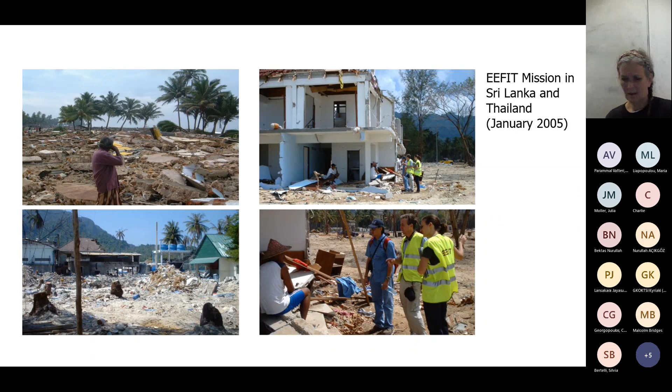Following the Boxing Day tsunami, a series of initiatives were brought forth, aimed at informing reconstruction, providing information on earthquakes and tsunamis, and considering disaster mitigation in Indonesia. Within 2 years, that had led to the establishment of the current Tsunami and Disaster Mitigation Research Centre. So when the Palu Bay tsunami happened in 2018, TDMRC were the obvious partner for the UK, and EEFIT began its very fruitful collaboration, including many projects led by UCL from the UK.

In the past few years, EEFIT has been looking at earthquakes and tsunamis over a longer period of time, not just a few weeks after an event. So they've done this for Japan and also went back to Nepal in 2022. We saw the opportunity of going back to Palu Bay in 2022, and then we thought, well, actually, we could do a follow-up from the 2004 Boxing Day event also, since we hadn't been able to go to that particular location.

However, due to the enormous physical extent of the Indonesian islands - Sumatra in the west and Sulawesi in the east - we decided it probably needed to be 2 different teams because the travel would be too onerous. A key aim was to compare the recovery from those 2 events, bearing in mind the different time that had elapsed and also the different scale.

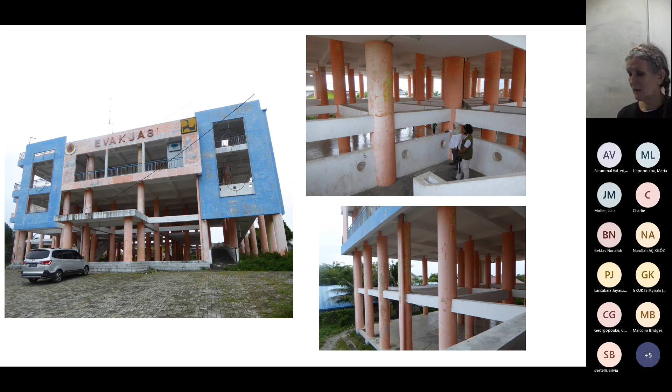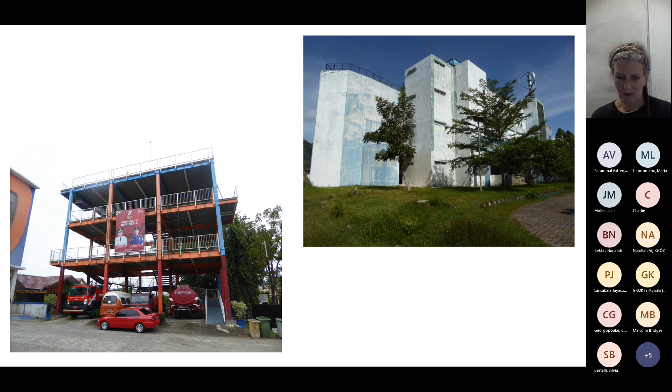We visited several vertical evacuation structures, and we heard from the director of the TDMRC, Sam Siddiq, about people's reticence about using such structures for evacuating, largely due to cultural reasons. Yunita has been busy identifying candidate buildings that might be more suitable for evacuation structures. Incidentally, the building on the top right is the previous TDMRC building, which is used as a vertical evacuation structure.

We also saw post-2004 developments that had been constructed by overseas donors, NGOs and the like, and we saw some occasions where they had been, should we say, personalised by the residents. In this location, the ground floor, which was just supposed to be an open stilted structure, had been filled in, and in some places was used as habitable rooms.

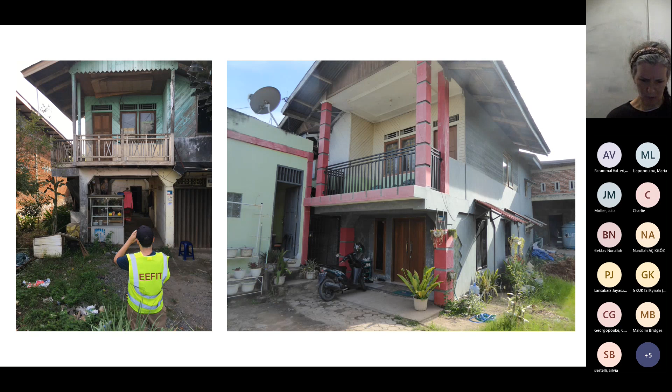I haven't shown any slides for this, but we did have meetings with planners on one of the days, and I think we were encouraged by some understanding of past decisions and future strategies, particularly around moving government offices further inland away from the coastline, with a plan to create more of a new town further from the shore.

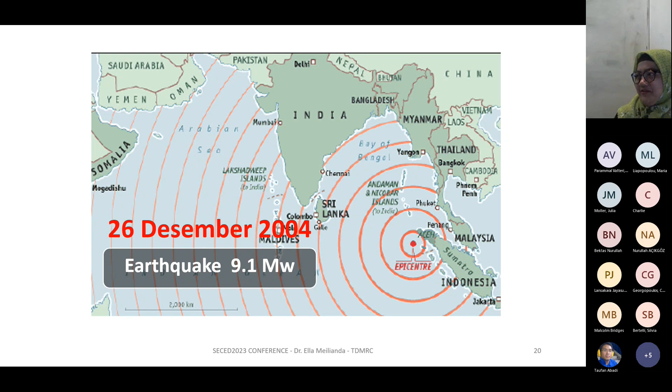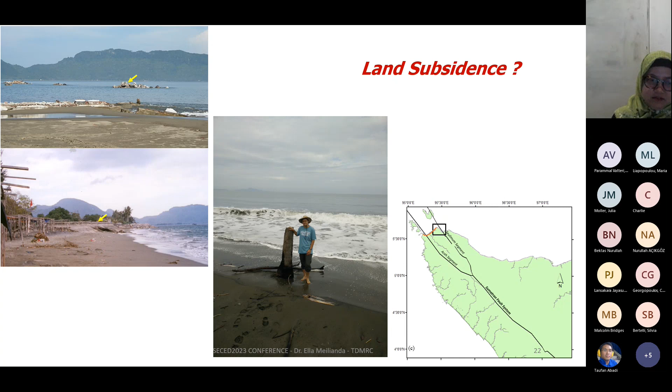weird situation where tree trunks are actually at the surf zone, which is not really a regular thing. They're supposed to be on higher ground where they're not exposed to the sea. This is what we can identify, but very subtle indication of subsidence—you can see it for yourself.

But on the West Coast, we have more evidence of land subsidence. You can see these are all coconut tree trunks which are not supposed to be there in the middle of the sea. So this is what we can evidence along the southern west to southern coastline of Aceh.

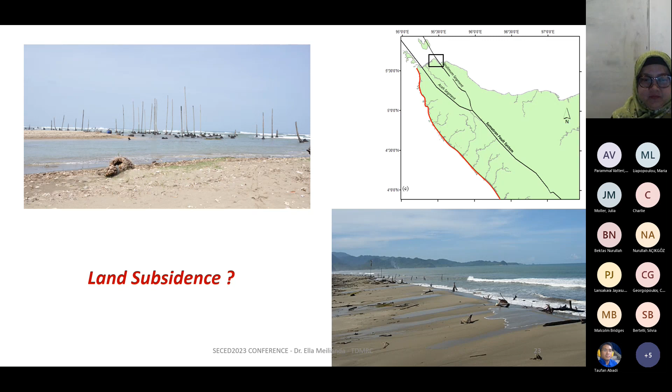So what I'm trying to say here is that the dynamics since the tsunami in 2004, even after 10 years, are still very dynamic, and it requires further consideration about the dynamics of the sediment that returns to the coastal area if we want to protect the coast.

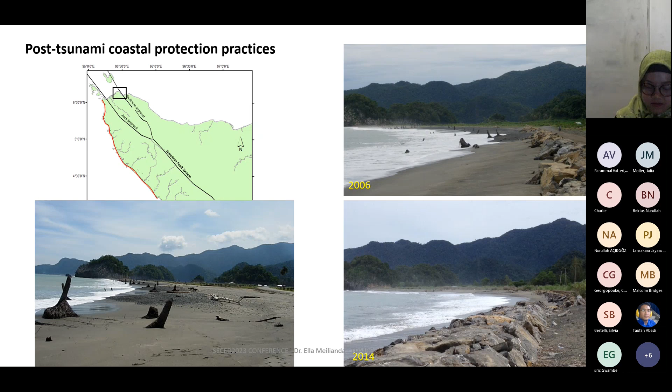So this house was supposed to be located quite far away from the coastline previously, but now it's getting really close. And the coastal road here has to be protected, because that's the only access to get along this coastline.

But as you can see, after a while, this kind of structure also failed, and they need to construct the protection again. So there's a lot of money involved, and the solution is really temporary in that sense.

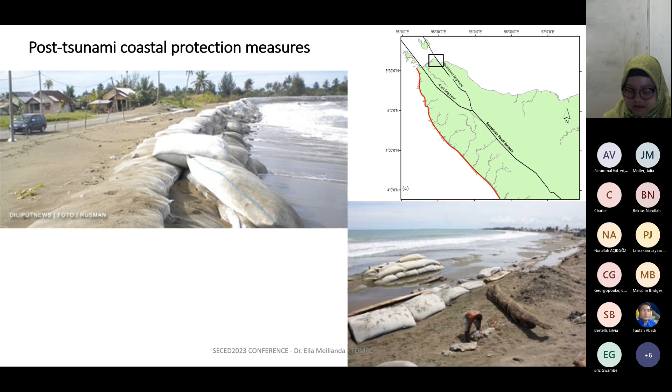So we're talking about the overall situation of coastal development after the tsunami along the coastline in Aceh. But here I want to show you the area which is really close by to our city, Banda Aceh.

And you can see that there are also coastal structures to protect the inland. This is the rubble mound breakwater, and then this is the revetment. And you can see different places—the morphology responds differently. I will show you the location of this.

But in general, they want to build this coastal protection in order to protect the new development of the area. For example here, they built very tall buildings for housing, and also to protect the compound of the schools behind it. So there were many proposals for that, but it turns out that...

some measures were not really appropriately designed, so it's overtopped by sand, showing that there is some process still going on towards equilibrium for this area.

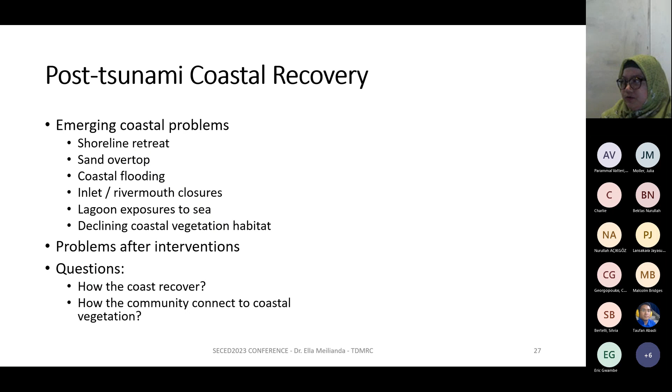So what we did is to monitor the shoreline changes in the short term and also in the medium term. We collected data from satellite images and digitized shoreline positions between 2004 to 2005 to indicate how far the shoreline has receded due to the tsunami, and then the shoreline position afterwards within the same time frame, 6 months. This is the short term. We also collected more data in the longer term from 1989 to 2017, that's 15 years before the tsunami and 13 years afterwards.

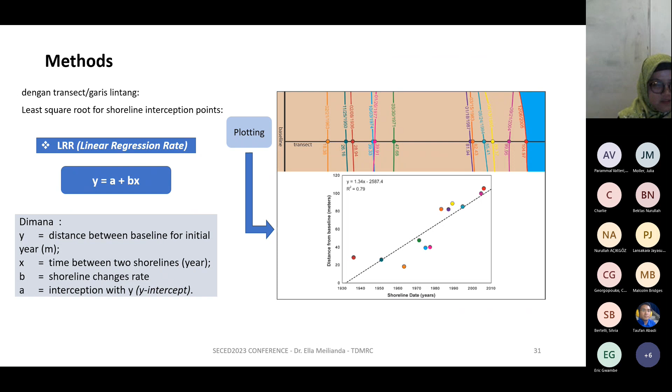You may be familiar with DSAS, the Digital Shoreline Analysis System, developed by USGS. We used this incorporated into GIS analysis using ArcGIS, and we used the LRR, which is a very basic method to measure the changes of the shoreline position.

This is our first attempt to see the changes. On the upper panel, this is the area of Banda Aceh, near the ferry port, which is really in the center of Banda Aceh city. You can see the changes, quite dramatic.

What I want to show you in the graph is that it experienced quite a considerable amount of shoreline retreat, but because the sediment was not returning quickly within 6 months, the coastline was still in an eroding state, reorganizing itself to smoothen the chaotic shoreline.

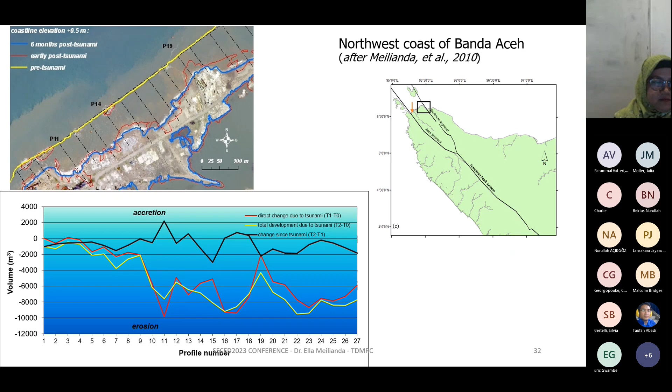So this is what happened on the north coast. We also looked at the west coast, which faces the Indian Ocean, where a lot of sediment was brought in quickly after the tsunami. After 6 months, the sediment that had been brought offshore by the tsunami returned to the area by 60%, so there's some accretion process going on. These are two different morphological developments in different areas.

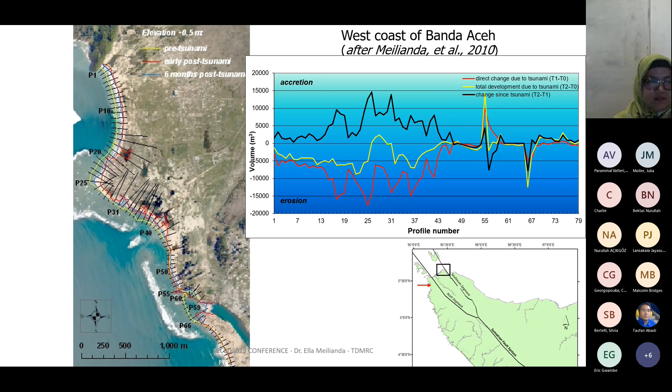So now we extend our research site to this area, northeastern of Banda Aceh. We are interested in seeing the different morphology and how it develops afterwards. Segment A, segment B, and segment C have different characteristics of morphology.

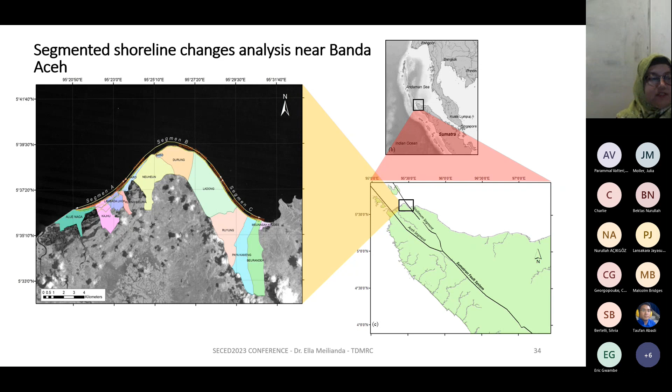In segment A, it is a very low-lying lagoonal coast with barrier islands and small creeks. Before the tsunami, it was protected by a barrier island, and the lagoon system had only one inlet for fishermen to access the sea. But post-tsunami, the lagoon is now exposed to the sea in most parts.

After the tsunami, about 65% of the barrier island has disappeared, and there is quite an amount of sedimentation in the lagoon. The breach of the barrier island created multiple inlets. After 18 years, the dynamic of the inlet is quite high as well, showing that there is a lot of littoral process going on in that area with a sufficient amount of sediment to restore it.

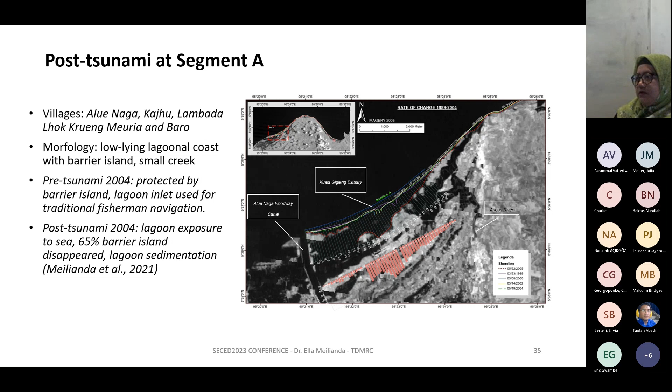And yeah, so these are the jetties. Because there are a lot of sediments coming in and littoral transport is quite predominant in this area, the fishermen need to protect the inlets in order to get access to the lagoon.

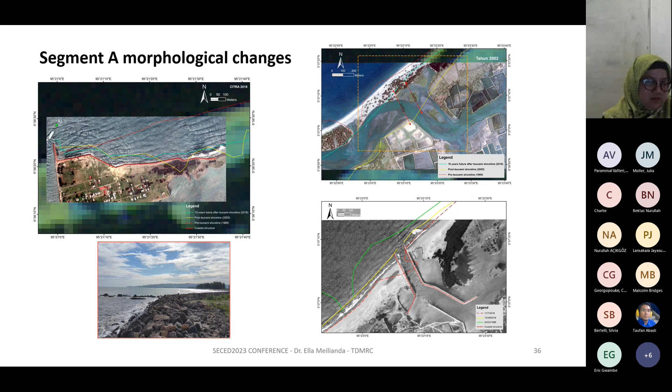There are some seawalls built at the start of the segment, like this rubble mound here, but it failed at some point.

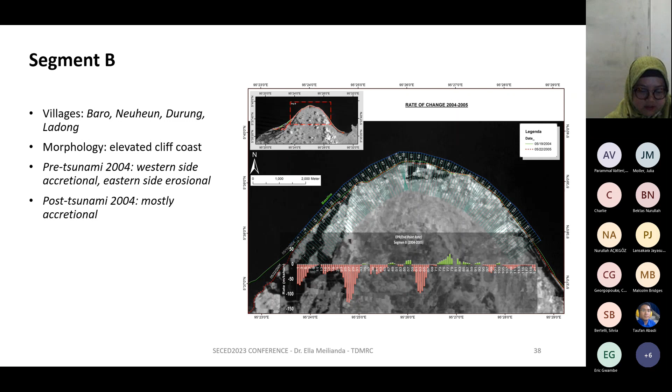In segment B, this is the area where the morphology is an elevated cliff, and on top of it there's a small, narrow strip of beach. This is how the situation looked after being eroded by the tsunami.

In this segment, because it is close to the facilities here, there's a compound of the Naval Academy, which is a really broad complex, so they need to protect the area. Several coastal protection measures were installed to protect it, but most of them, as we see, are buried by sediment because a lot of sediment has been brought in.

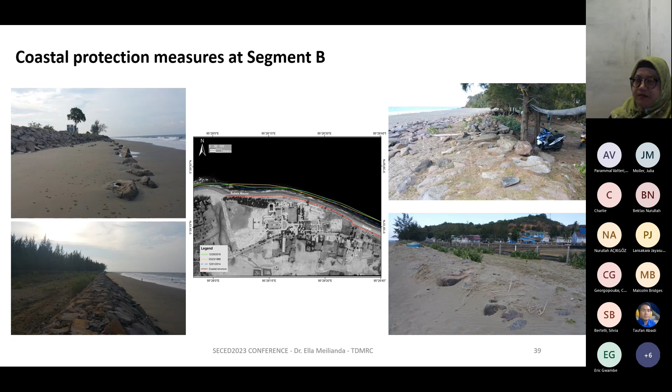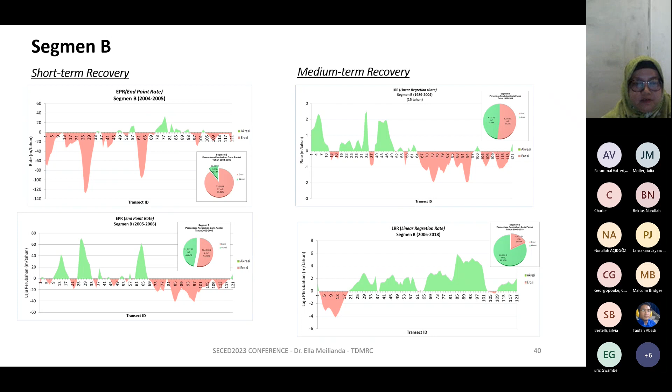This is how it looks like. If you can see, on the medium term, the coastal area is actually accreting. And segment C is a slightly elevated lagoon coastline. Before the tsunami, it was mostly erosional, except at the transition to higher ground towards segment B. Then in the post-tsunami medium term, the coastline becomes more accretional.

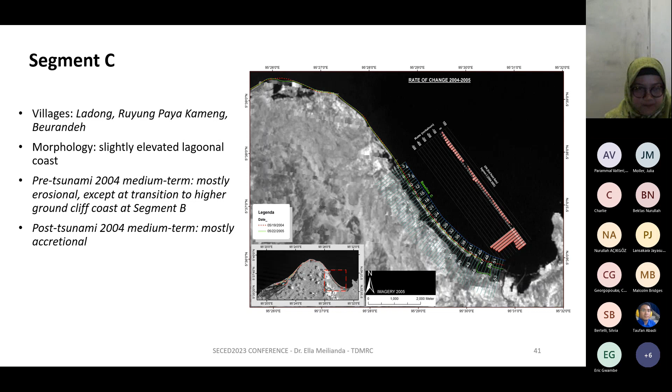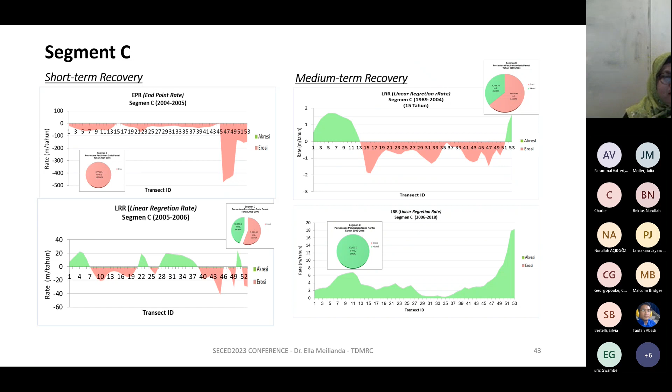You can see that in the past, before the tsunami, the area was actually an erosional area, and then after the tsunami it becomes more of an accretional area.

So my conclusion is that the eroded coastal area due to tsunami occurred mostly at young and recent morphology, like the sand spit that extends from the older barrier islands. This kind of feature is mostly eroded during the tsunami, and it depends on how the waves brought sediment onshore again and the littoral transport, which in the end can either close again or stay open.

Barrier island breaching by tsunami may cause extensive damage to the lagoonal coastal system, but may be recovered if the rate of sediment accumulation is sufficiently high. In extreme cases, breaching may create new inlets or cause irreversible loss of barrier islands.

Most of the investigated sites affected by the 2004 tsunami are still in a state of recovering towards a new equilibrium, which may be predominantly driven by relatively high rates of accretion, even more than a decade after the event. So management in such tectonic tsunami-prone coastal areas should incorporate post-event changing rates and trends of shoreline development.

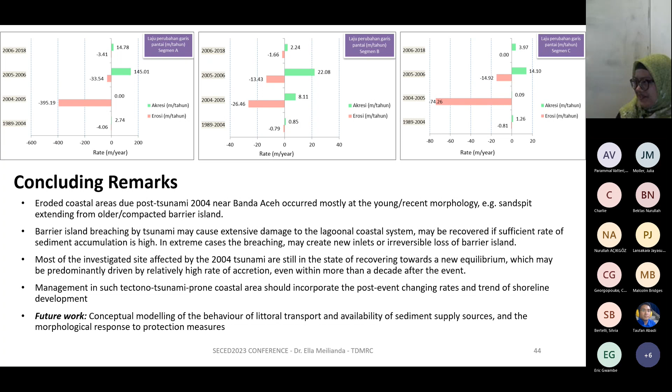I'll talk a little bit more about coastal vegetation. I want to show you that there is a good habitat of mangroves in Langsa, the eastern part of Aceh, which was only slightly protected from the tsunami, although it still had some effect. They have mangrove conservation in this area because it's located in the Malacca Straits, so it's quite protected.

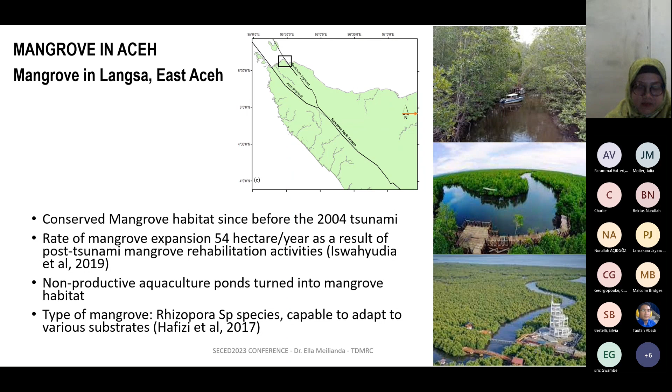But compared to this area, compared to Banda Aceh, there used to be quite a dense population of vegetation like mangroves in the past, but after the tsunami, it's difficult to develop to the same amount of area.

So we did a little bit of survey with the community that lives there. About 40% of the people who currently live there are those who lived there before the tsunami, but the rest are newcomers.

They don't really understand how the mangrove ecosystem works there, and they're not really attached to it through their economic activities. Mostly the mangrove ecosystem here is only to protect the area from wind and high waves. So this is what we have, based on very little observation.

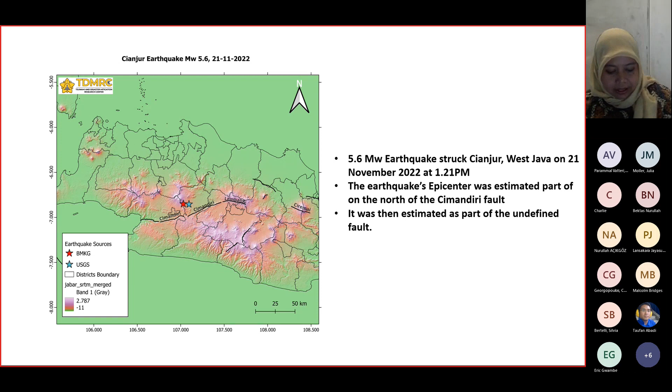Just this morning, Indonesia launched their new seismic hazard map for 2022, but this fault is not published yet in the updated map.

So there is still a discussion about this undefined fault.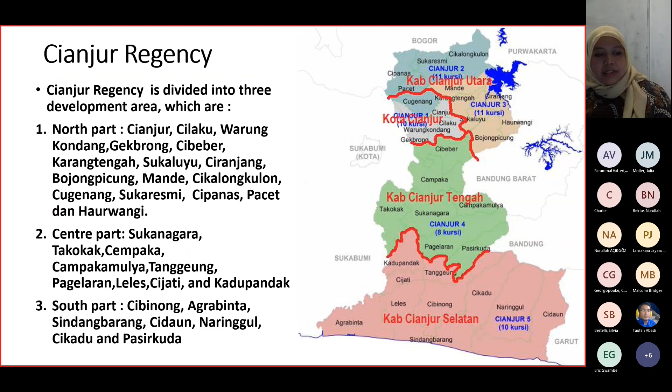Cianjur Regency is part of West Java, divided into three parts: north, center, and south. The north part includes regencies like Cianjur, Cilaku, Warung Kondang, Gebrong, and Cibeber, etc. This is the part we found to have the most damaged construction, the most damaged area during the Cianjur earthquake.

This is based on surveys from our meteorology and geophysical agency. This fault passes through the northern part of Cianjur, including the regencies of Cugenang, Cianjur, and Warung Kondang, etc.

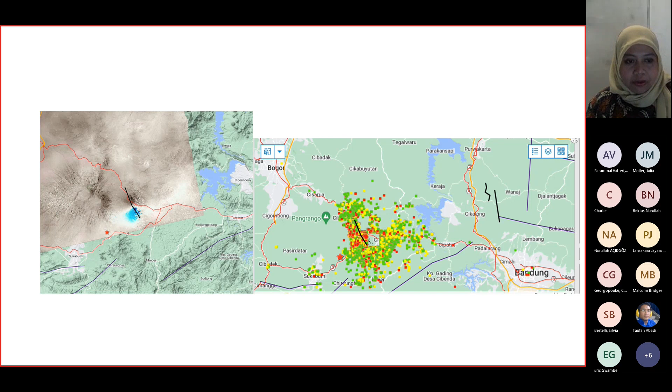Based on this fault, we tried to make a rapid analysis of the seismic hazard. Using the PGA, we separated it into 10 MMI levels, and we can see that around the fault, the most damaged areas include Cugenang and also Warung Kondang.

You can see the epicenter location estimated by BMKG shown in red, and the blue star is the USGS estimation of the epicenter location.

These are the schools that we observed during the rapid assessment survey, including five regencies from Cilaku. This is from the Cilaku area, mostly Cugenang area, some from Gebrong, and the green one is the Warung Kondang area.

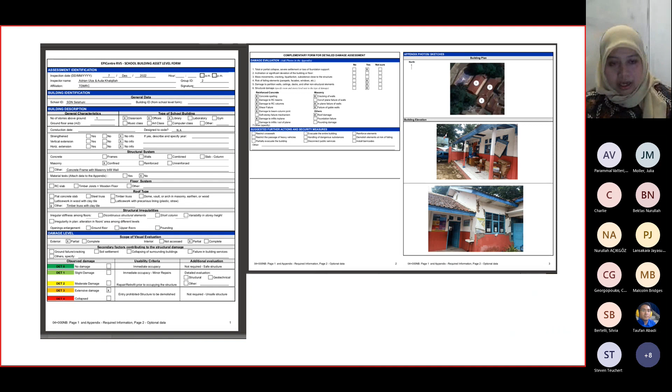What is the typical typology of school buildings in Cianjur or West Java? I think it's a bit similar to what we have in Banda Aceh for low masonry buildings. We first thought it would be reinforced concrete with infill masonry, but looking at the diameter of the reinforced bar, we doubt it could be classified as reinforced concrete frame. It's probably closer to confined masonry or masonry.

The diameter of the bar is less than 10 millimeters, using smooth bar, not deformed bar. A typical school construction there uses clay tile for the rooftop, having a gable without sufficient confinement, so it tends to fall or get damaged during the earthquake.

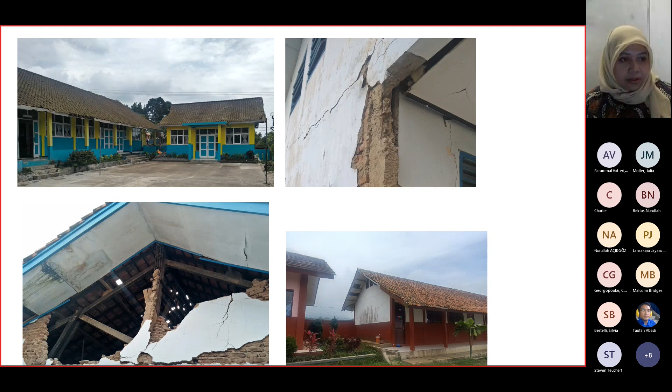This is the damage state criterion for observation of the schools. It starts from DS0 with no damage, where we found some schools with no visual damage at all, already restarted after two weeks. We came two weeks after the event, and there was also slight damage with no structural damage, but visual hairline cracks, and damage to cladding, windows, doors, and fixtures. DS2 has no structural component falling, but cracks up to 3 millimeters can be found at the beam and column joints and on the masonry wall.

For this kind of moderate damage, we can also find heavy damage to collapse of non-structural components, such as the roof cover, gables, and also the parapets.

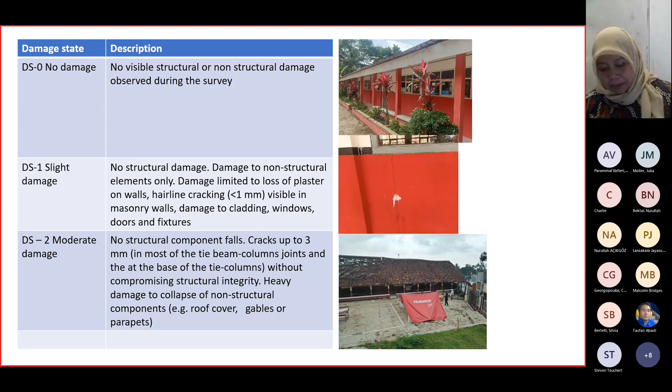These are examples of DS3, extensive damage, where the roof structure and main components of the construction are damaged and need to be repaired soon, an extensive damage state. DS4 is where more than 50% of the building is completely collapsed.

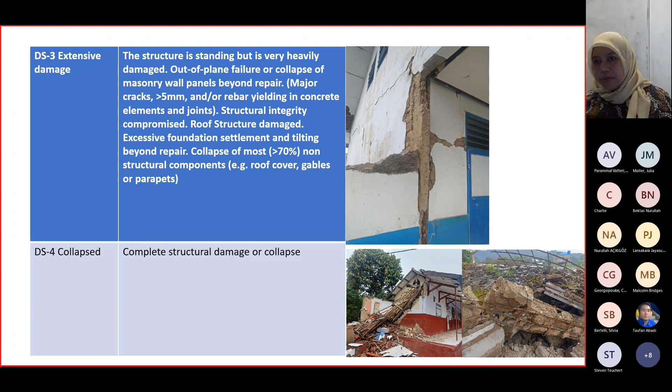Based on the PGA group we used previously, based on the fault, the Cugenang fault, the fault was determined from the distribution of damaged houses and damaged area. We digitized and made an estimation of the PGA, grouping locations into the damage state of the observed schools. This is the group of the PGA or location, which we got from Sukalarang and Cilaku.

It can be grouped into the PGA 0.3 to 0.32. So there's no visible damage state 4 and 3, but they have damage state 2 buildings, and mostly no visible damage for schools in this area.

But for the location that has PGA 0.34 and 0.36, there's a gap here, but I think because this is still rapid analysis, maybe we can come up with a different result as well if we start to separate the buildings, here still as schools.

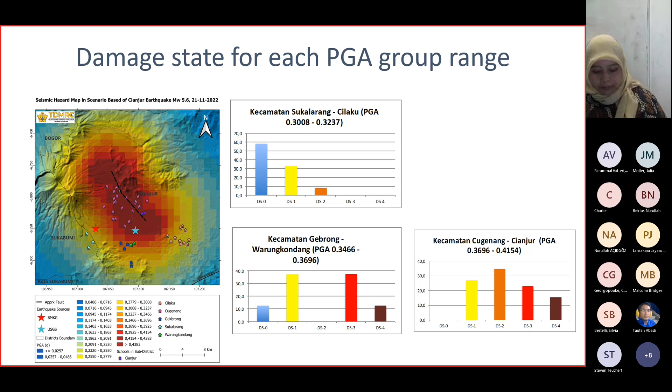So now this is the government - there's an issue that they will build a new construction, the precast construction called Risha. Risha is the technology using panel precast concrete that will have a knockdown, not knocked down, assembled on location, but using the precast panels.

This is an example of a Risha school in one location in Cianjur, I think in Cilaku Regency, about PGA 0.3 to 0.32, where no damage state 3 happened there. So this school had no visible damage, but had non-structural damage like the ceiling being affected, something like that.

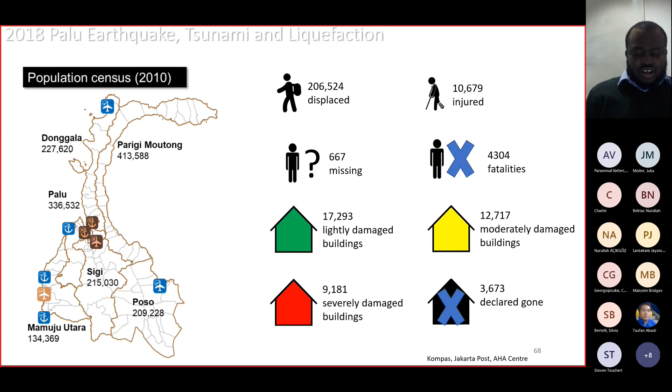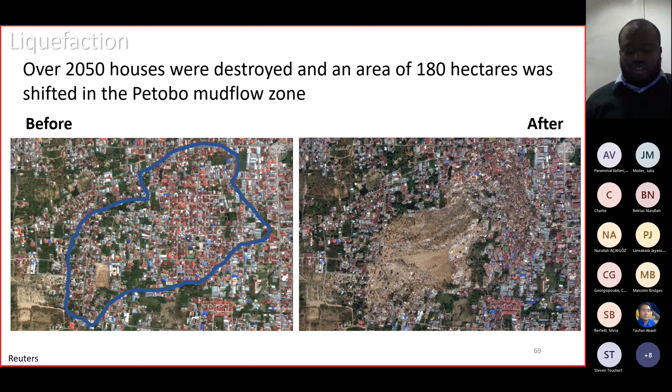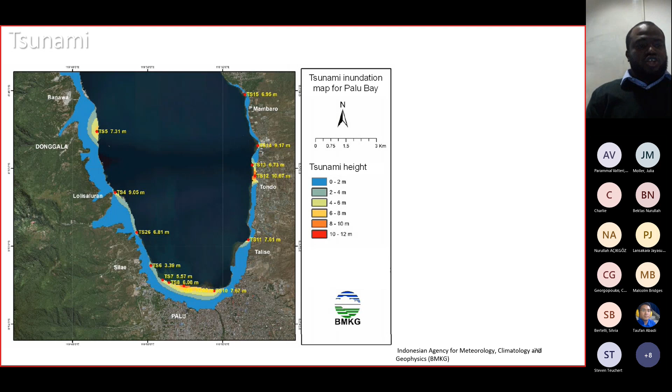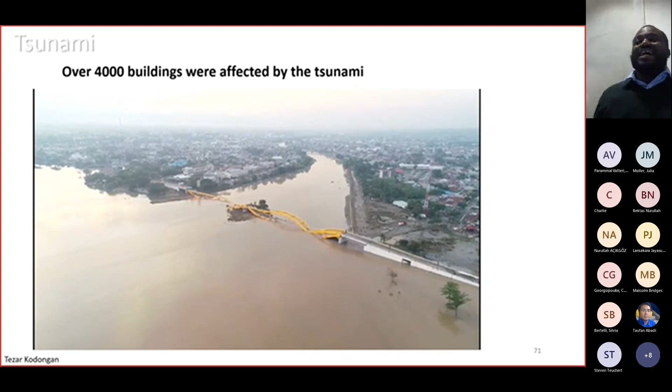Just to show a bit of how severe the event was, here is a video from a drone after the event, and you can see the magnitude of damage that was actually experienced following the tsunami around the Palu Bay area.

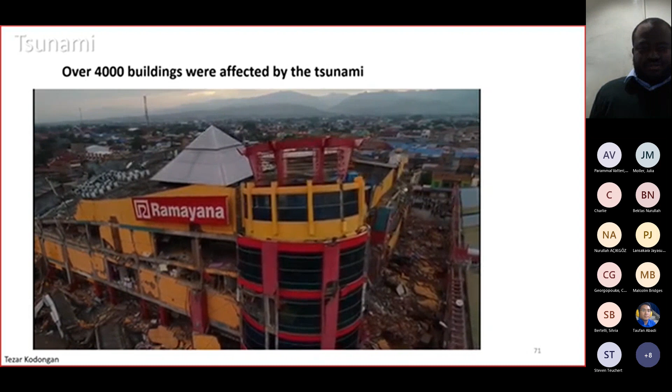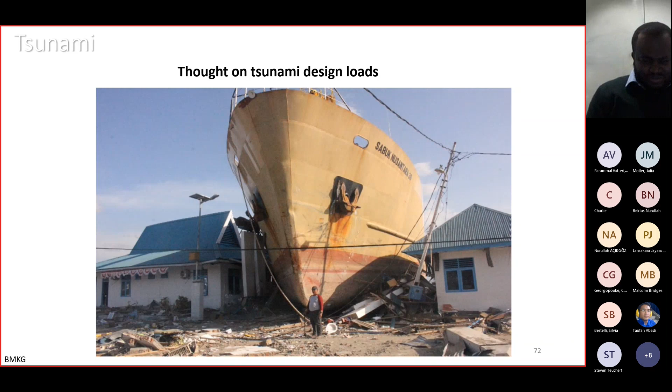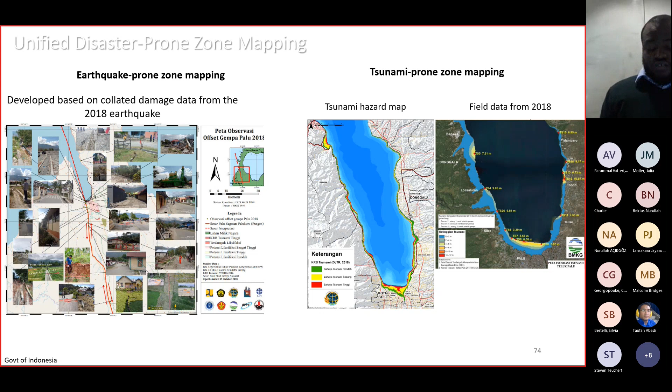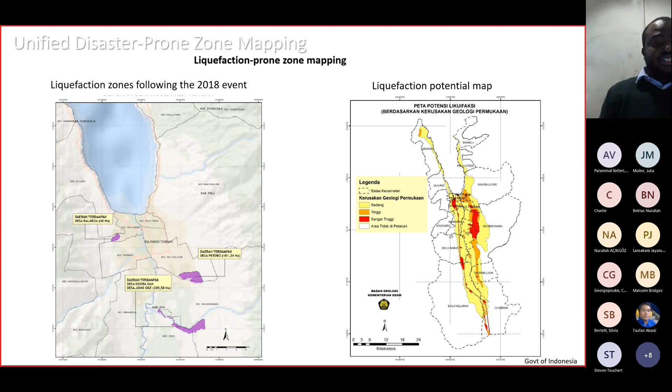They also looked at the field data from the tsunami affected areas, as well as an existing tsunami hazard map, to work out the zonation for the tsunami hazard. The same thing was done for liquefaction, in which they looked at theoretical estimates of the liquefaction potential indices, as well as the liquefaction zones from the 2018 event, overlapped that with the flood and ground movement cases, and then ended up with this map.

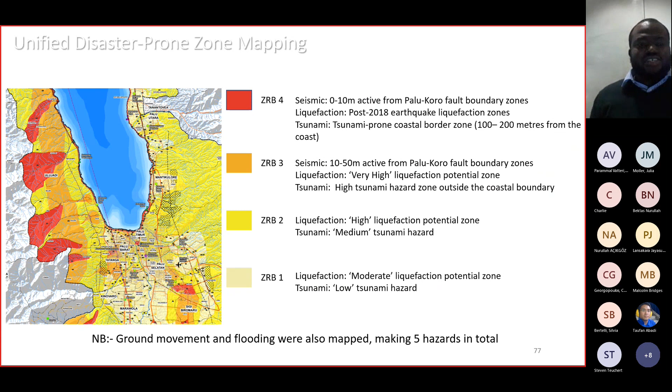So it's a simple approach, but it is quite straightforward in terms of how they were able to define the places where reconstruction was allowed and places where it is not allowed. When you think about this, it's fine, but this does actually have a very big impact. For a building that has suffered heavy damage and is located in zone 3 or zone 4, which are the restricted and forbidden zones, no form of reconstruction can be allowed.

On the other hand, if your building were located in zone 1 or zone 2, where development is allowed, the government would give you some form of money to be able to carry out this repair.

For buildings that suffered minor and moderate damage in the restricted zone, if anybody wants to carry out repair, they have to sign an undertaking for this repair to be carried out, and they were given some amount of money to cover this repair.

So in this presentation, I will focus more on how the reconstruction process worked. That is because, mainly for long-term recovery, which is one of the metrics for looking at resilience, we really care about the reconstruction process as one of the key drivers for a community.

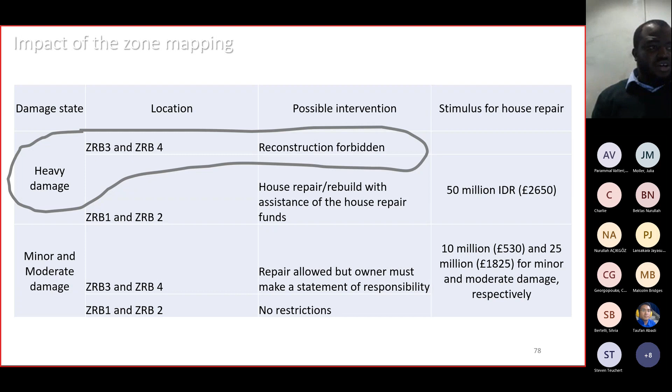Now here's a question that has been around since the Indonesian government came up with the map: even though it's simple, is it too conservative? When you think about the number of people displaced as a result of this map, the number who will have to move from their place of business to another zone, do we need to be that strict?

That's really some of the things the Japan International Cooperation Agency also looked into in terms of describing what they think the map should look like. On the right here is what JICA came up with, and on the left is what the Indonesian government came up with, and you can see a difference in that.

I can also point out that there are other studies that have come up with their own variant of what this map should look like, some more deterministic than others, while some are more probabilistic. But the idea is, given the impact this map could have on recovery, how strict should we be when developing this type of multi-hazard map?

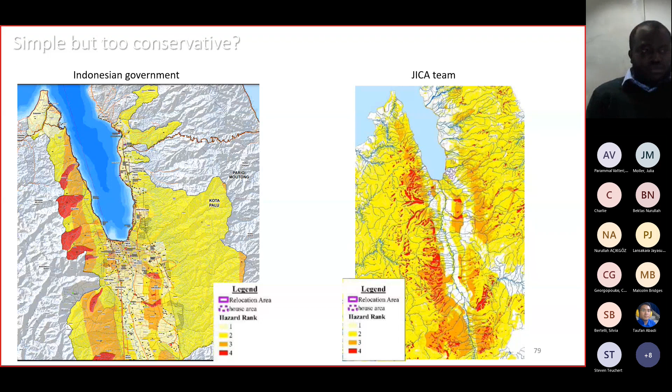So like I mentioned, I will focus more on the displaced people because they were really the most affected by this event. After the 2018 event, some of them had to find themselves in IDP camps for several months. From IDP camps, after some months, the government made available some temporary housing, locally referred to as Huntara, and some of them moved there and spent a couple of months as well.

People in Huntaras were then moved on to Huntaps, which are the permanent housing, a couple of years after the event. There are still lots of people living in temporary housing until now, because a lot of Huntaps are still under construction.

So talking to people who actually stayed there, one of the biggest challenges they felt was the uneven distribution of supplies, as well as the lack of clean water. But amazingly, a lot of people also mentioned the lack of privacy for families. If it's for 1 or 2 weeks, you might not mind that, but when you have to spend so much time, it became a concern for people. That was something that came up in our interviews, and we found that to be a bit interesting.

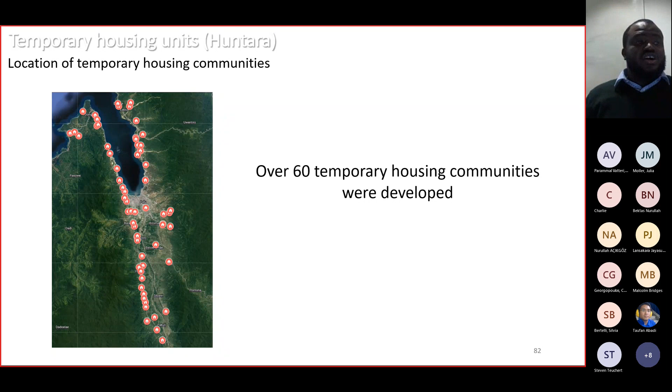The next thing to talk about is temporary housing. There were a couple of temporary housing communities that were built, and we visited a couple of them together with the EEFIT team. Here is the distribution of about 60 of these temporary housing communities.

In terms of structure, they are mainly made of light steel frames with gypsum boards serving as the walls, and each unit is expected to serve 12 households. In total, I believe the government was planning to initially build about 700 of these, covering about 8,000 households.

But one of the things that really became tricky was that after 4 months, only 30% of them were built, which means 4 months after the event, lots of people were still spending time in IDP camps, which wasn't ideal because IDP camps are not developed to serve that purpose.

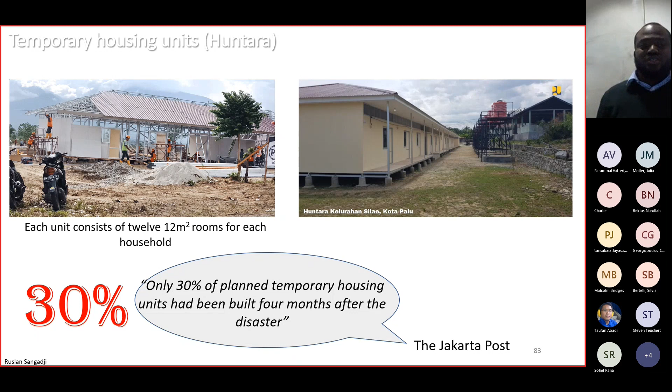But the problem also trickles down from temporary housing to permanent housing, because temporary housings are actually designed to have a lifespan of 4 to 5 years.

But the issue is, when we visited some of these temporary houses and found people still living there, what we noticed is that because it's been 4 years after the event, we can see deterioration happening. Some of these people might not have permanent housing for another year or so, and it's a challenge because within the next year there could be more deterioration and people could find themselves homeless.

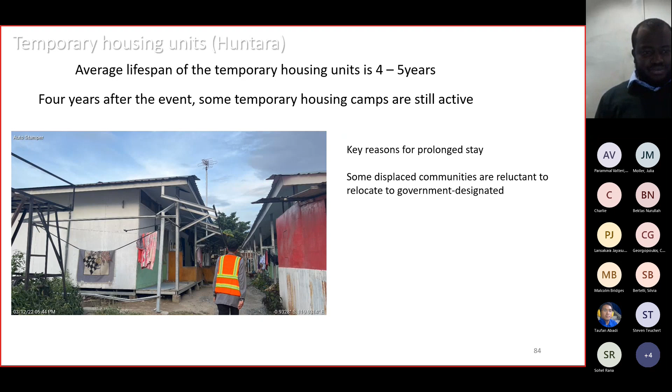This shows how community resilience is not really at the ideal level where you would want it to be. So let's talk a bit about the permanent housing units.

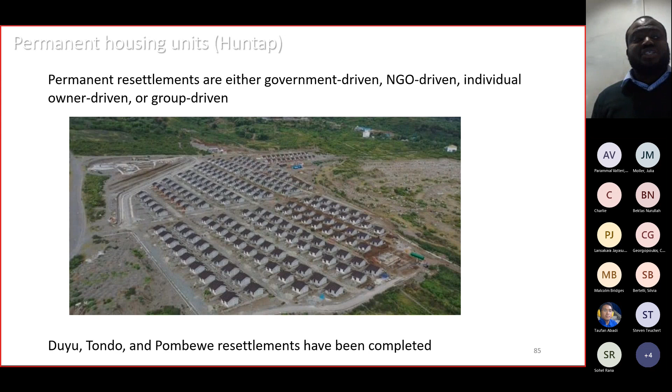We visited about 3 of these resettlements, one in Duyu, another in Tondo, and another in Pombewe. Here is a drone view of what these settlements look like. These settlements could either be government-driven, NGO-driven, individual owner-driven, or group-driven.

In terms of typologies, you have the precast concrete frames, locally referred to as Risha, and then you have the facade made with conwood, which is pretty much a cellulose fiber reinforced cement board. We found these two types more in government and NGO funded settlements.

But for owner-driven settlements, most of them actually used confined masonry buildings, because they were using local builders who are more familiar with this technology.

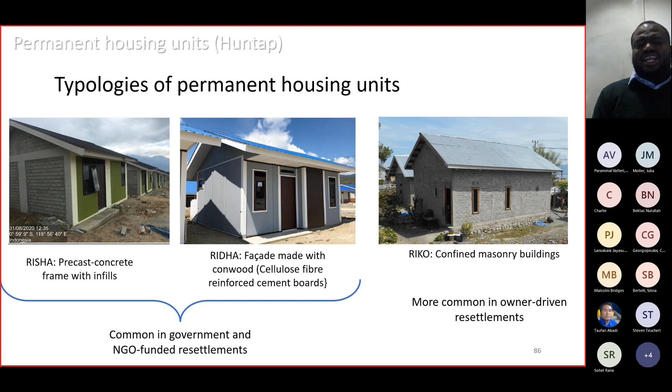The last part was really the group-driven resettlement, more or less an initiative used to deal with clans that want to move together as a unit. We found one of these groups in Mamboro.

Whereby the group used to live so let me get the, sorry, let me just get a pointer.

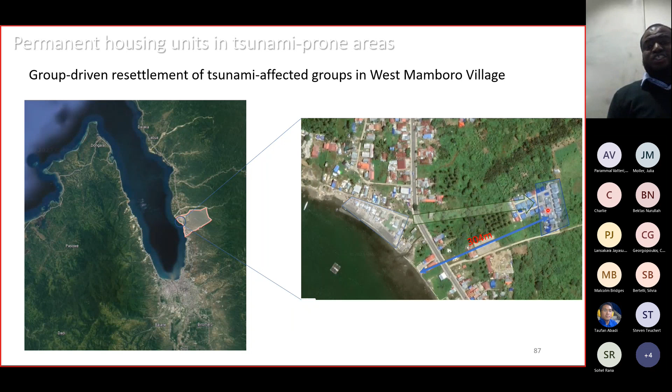The group used to live just around here, but the settlement was really affected by the tsunami in 2018. So a new settlement was built for them just about 300 meters away from the coast. We visited this new settlement, and the houses are actually still there.

The idea is that, according to what we were told, the government spent some time testing out the structures to ensure they are tsunami resistant. You have the Risha panels at the base, at the ground floor, and then a roof, a timber frame, as well as timber flooring at the top of this Risha frame. As we all know, keeping the ground floor open is good to allow tsunami waves to pass through.

We are carrying out detailed analysis as well to really see how this can be designed using hand calculations and all, but according to what we've been told, structural testing was carried out.

But going through Palu, there was a bit of interest in really seeing the country's richness and history towards stilt housing, because I found a multitude of those types of buildings spread across the region, and there has always been a culture of stilt housing in Indonesian vernacular architecture.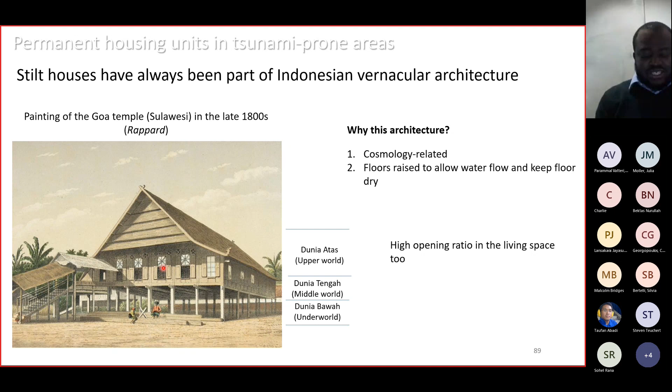So while we know this, it's also important to understand people's culture and how they perceive risk. Here is the former picture which I showed on how the buildings were designed and given to this community, and on the right is actually what we saw when we went to visit.

People pretty much closed down the ground floor and turned it into another living space. This is really quite a big issue, because when you talk to them, they weren't really thinking so much into whether they shouldn't have done that or not.

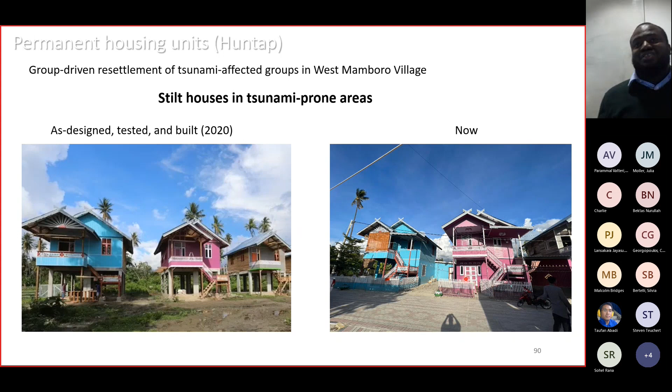That is something of a challenge, because whenever NGOs have interventions like this in a community, it's important for them to go back there after some time to really ensure these are not the type of modifications that could impact the vulnerability of the structures. So that's the information about residential buildings.

Now we're going to talk a bit more about engineered buildings like hospitals as well as large schools. The Islamic State Institute was severely impacted by the tsunami in 2018.

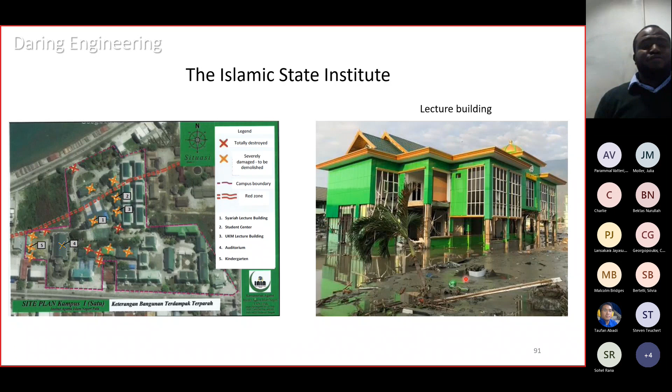As part of the rebuild process, 4 new structures were being planned. Like I mentioned, you have zone 3, which is a bit of a restricted zone, and this new campus is actually at the boundary between zone 4 and zone 3, and they wanted to build there. Something else quite interesting is that this area has a high liquefaction potential as well. So you have a situation where you are designing a building against earthquake, tsunami, and liquefaction.

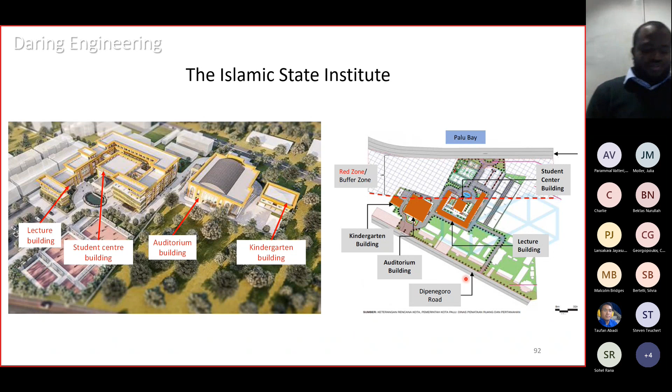We visited some of the buildings, and this is really what it looks like. Apart from being designed to resist these multi-hazards, the buildings have also been designed to serve as vertical evacuation centers. You can see how large some of these columns are. On average, the columns in the building are about 800 millimeters, and the spacing is about 4 meters, showing their intention of making these buildings as stiff as possible.

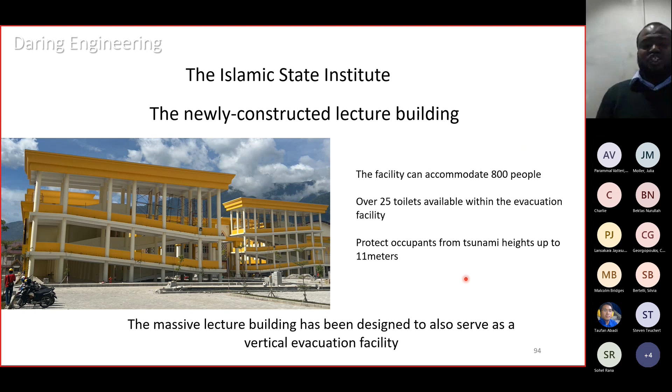Also, the vertical evacuation facility can accommodate about 800 people, and there are 25 toilets provided. It can also protect against tsunami up to a height of about 11 meters. Each of the buildings has a bored pile of about 30 meters, I think, and in terms of the consideration, they believe the building can protect them against tsunami, liquefaction, and earthquake.

Something else that was interesting was another hospital located in an area prone to ground shaking and liquefaction. The previous hospital had been damaged by the earthquake, and for them to build there, since it's zone 3, there had to be special consideration as well. The new building is a 5-story building, and another design driver for them was post-disaster functionality, because it's a hospital. What they considered important was having 40 meter bored piles, having the building base isolated, while also ensuring the beams and columns are well detailed.

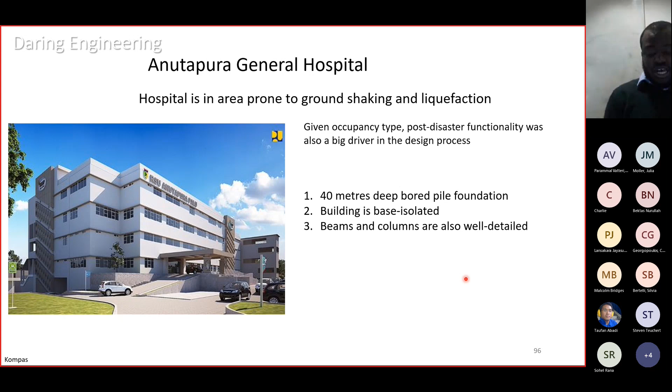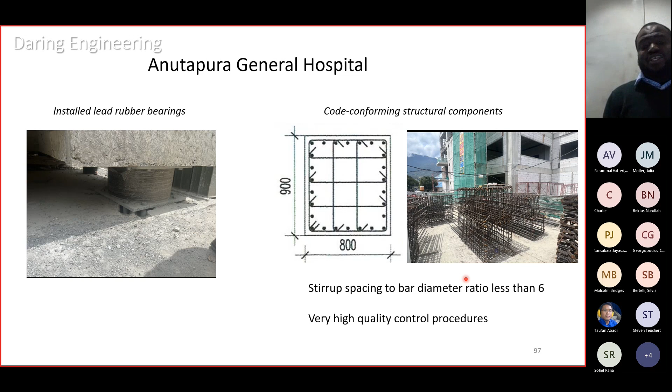So this is an example of some of the installed LRBs. And then obviously we did some survey around the sites, and we could see some of the code conforming structural components, as well as see the quality control on the site.

Something that has really been coming up in terms of post-disaster recovery has been the interdependence of infrastructure. Following the events, anybody familiar with Palu knew that the Yellow Bridge collapsed, and because of that there were also damages on the road leading to the bridge. So there are discussions about where to have the new road pass through.

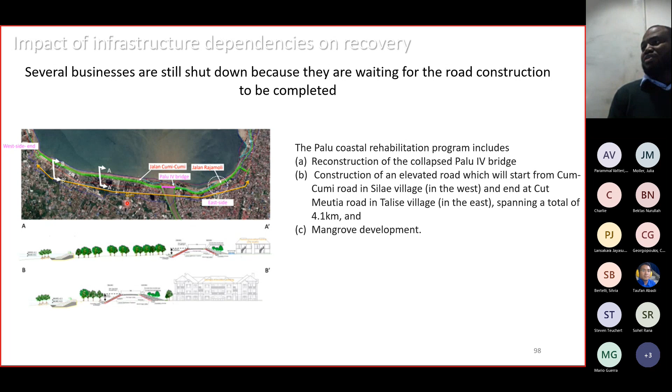But the problem is it's taking so long for this to actually start, to the point of even getting it completed. So there are lots of businesses here who are actually waiting for this road construction to start or even finish before they can repair their own buildings, because nobody really knows how long it's going to take and how they should plan their own business. So here is an example of the impact of infrastructure dependencies on business continuity.

Just to round up, we spoke with about 100 people during our time in Palu, and we were able to gather data on some of the socioeconomic aspects of recovery and what they think was important to them. One highlight is, while we think shelter is quite important, some people felt they cared more about business continuity rather than the place of shelter, because it's easier for them to get shelter themselves, but they were knocked out of business. Another thing which we tend to forget is really the non-physical domain of recovery, which is really the psychosocial part of it.

A lot of people were traumatized by this 2018 event, and we pretty much heard a lot of stories from people who were traumatized.

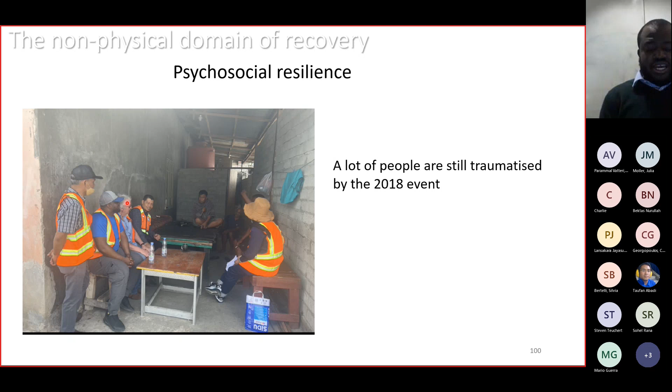So finally, what do we think is the next step? What do we think we're going to do with the lessons we've learned? It's really how we think we can contribute to disaster resilience using some of these things. Our thought is, how can we go from less resilient communities, which take a very long time to recover with a high level of functionality loss, to communities that have a lower level of functionality loss, as well as a high rapidity in terms of recovery.

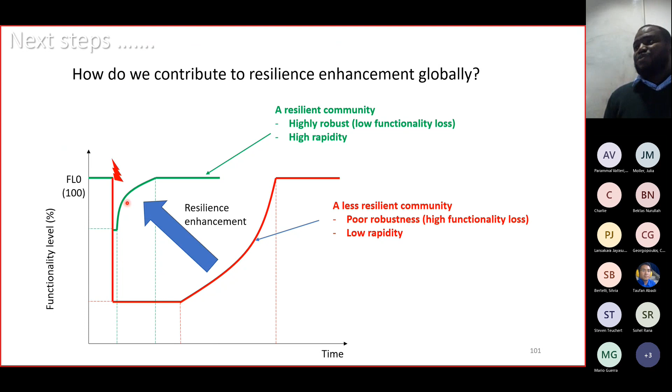And these are some of the research work that are ongoing here right now. Hopefully in the next coming months we'll be able to share more details about some of our research work in terms of post-disaster recovery modeling, as well as recovery enhancement frameworks. Yeah, thank you.